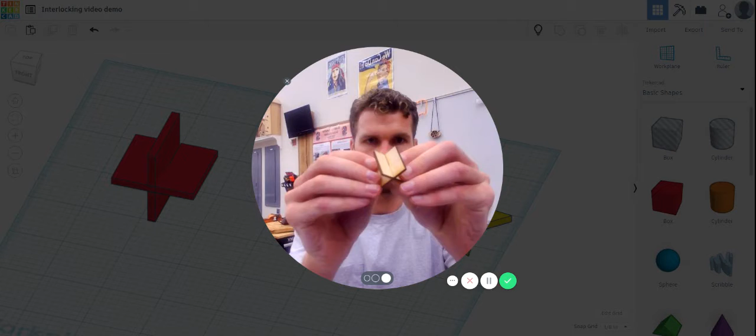Hello, students. So far, we've been designing things for the laser cutter that end up being pretty flat. That's fun, but we might want to start making three-dimensional things here. So we are going to learn how to make things that interlock, like this simple little piece right here. And if they slide apart, you can see they slide together and make interlocking shapes.

We can do that with other shapes besides just a square. Got a little vampire thing going on there, or a little star if you want to make an ornament of some sort, or you can make a spooky one for Halloween if you want, or whatever you like. So let's jump right in and have a look at this.

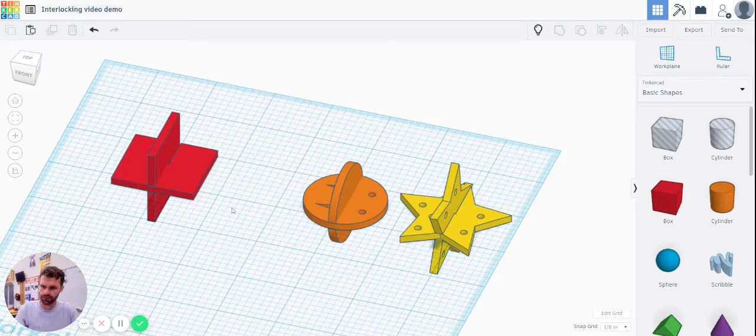So we're in Tinkercad. Here are those three objects in the virtual world. Let's start designing, and this can be really any shape you want. Maybe this time I want to start with a heart. So we'll start with a heart this time, why not?

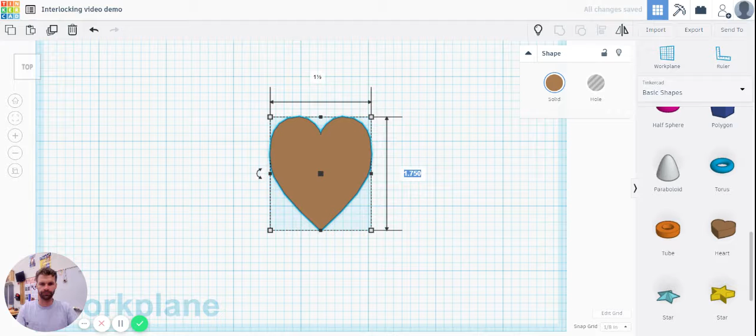The first thing we want to do is make this a reasonable size. Notice I'm already in inches. You should have yours in inches right now. And let's say we don't want to make this too huge. That's a pretty good size.

So the first thing you should do is, if you want to put any holes in there or teeth in there or anything like that, now would be the time to do that. So add your little holes and all that good stuff and group that like we've done in the past, and you can have some fun with that and do everything you want to do there.

Once you are ready to make the second piece and you've had all your designs done there, we are going to first have to make the interlocking piece. So if you see here, we're going to make that notch so that everything can slide together there.

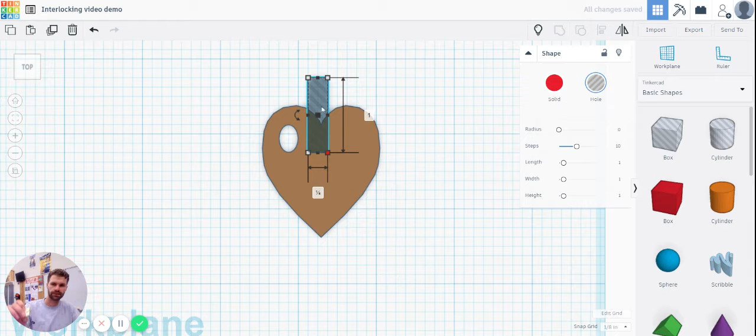So let's start by dragging out a nice little block there. And we're going to make this nice and skinny. How skinny this has to be depends on how thick this wood is. And I know, because I measured this for you all, that is going to be 1/8 of an inch, or 0.125 if you want to think of it that way. So let's squeeze this down and look at that. It snaps to 1/8 of an inch there.

And I'm going to get that nice and centered. And you know, that's not centering perfectly for me. So if you really want to get exact, you can use this tool that we've done before and align. All right, once you're happy with that, it's in the right spot, don't group it yet.

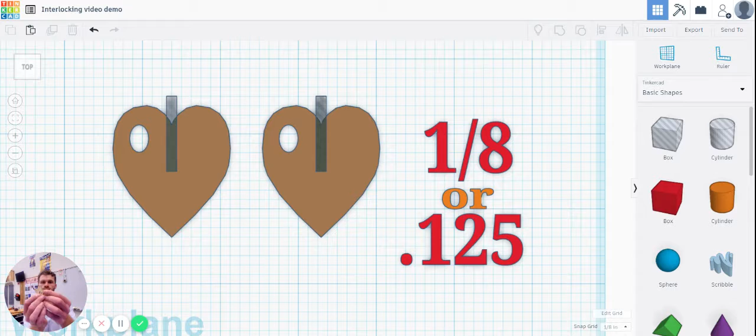We're going to make a copy of it. I'm going to say duplicate. I'm going to slide my second copy over here. And if you'll notice, when I have my star here, one notch is in the top, the other notch is in the bottom. And they line up where one starts, the other one ends, right? So when they slide together, they fit together in just the right spot.

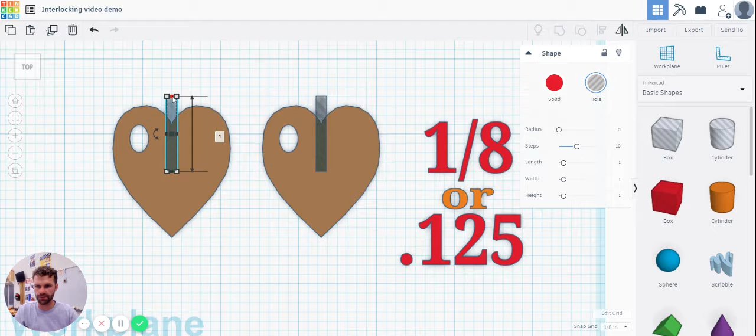So the easy way to do this is just to grab this and go. Now, if I was to move this over here, you can see that it lines up right there. Those two notches are going to line up in just the right spot.

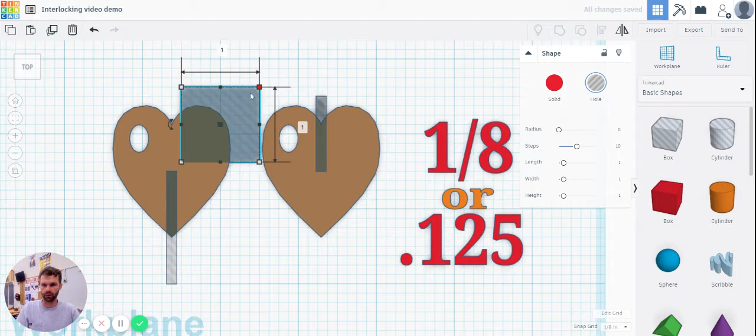Now, if you want to make one different than the other one, maybe you want to add some extra things to this one, you can always come back and maybe you want to put a square on there or whatever else. You can make it different. You should not have these parts overlapping like that. That's going to cause issues for you. Make them nice and separate.

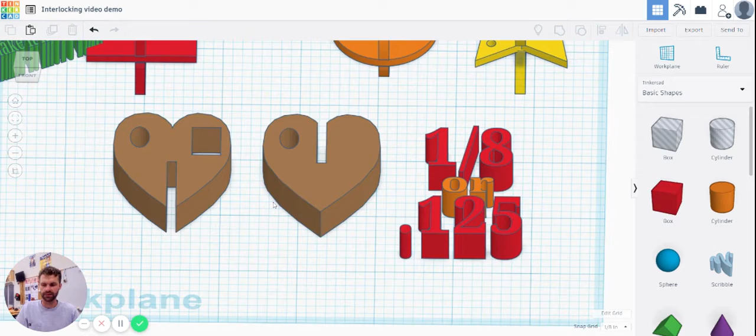When you're all good to go, you are going to group that, and you officially have two pieces that are going to interlock. So you'll notice that these other ones I had, they are like 3D mode, right? I put them and made them 3D. So I turned one of the pieces.

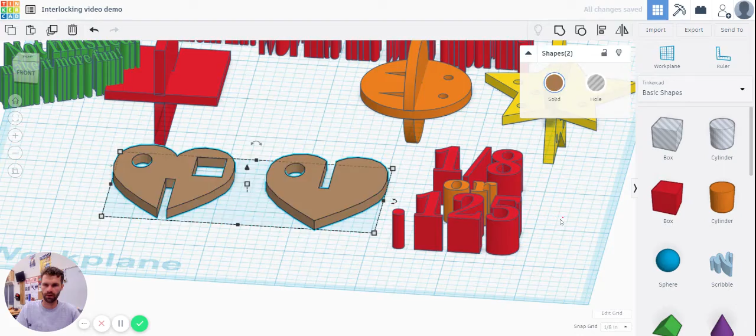Also, you'll notice that these are both a little wide right now. Let's make both of those the correct thickness here, which is going to be that same 1/8. When you are ready to export, as it says right here on the screen, leave them flat. This is good right here. That is good for exporting.

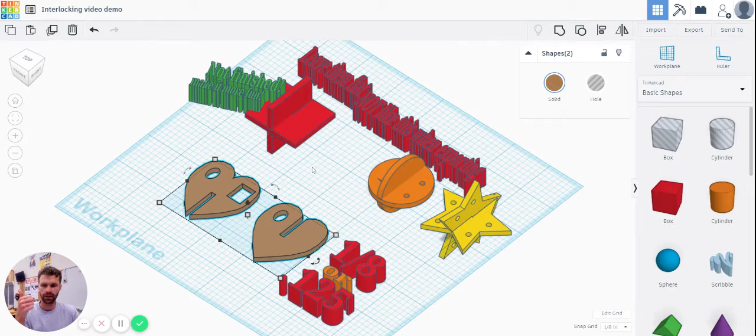When they're in 3D mode like this, if you decide to put them in 3D mode like that and rotate them around and play with them, put them back flat when you're done. They will not work if you have them like this, right? Notice these pieces just slide apart like that.

Also, this one is not good enough. That's too boring. Have some more fun with it. Put some holes in there. Get crazy. Make it look like some character from a video game if you want. I recommend Mario characters, like the little bomb from Mario or something like that.

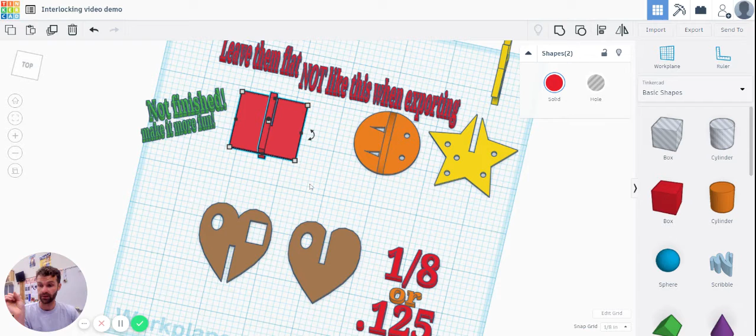It's up to you. Anyway, if you are thinking you get through the first one and you're like, oh man, this is fun, I want to make another one, I would like to show you my little side project over here. You want to make like a little animal. If you want to get crazy, you can do this after doing your first simple one. Get your animal together.

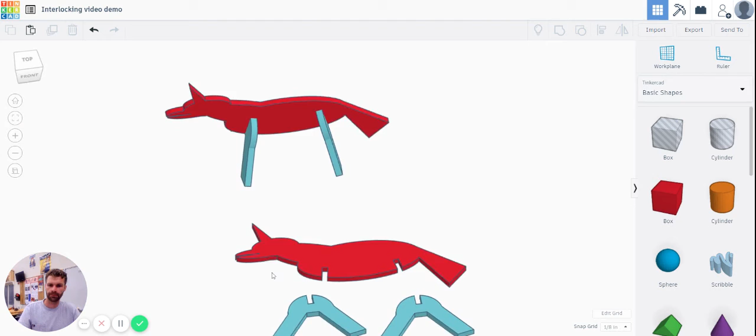This is after, I'm going to reiterate this, this is an extra bonus project. So if you notice, I'm ungrouping this to just show you how it was put together. This is just a whole bunch of shapes put together to make a little horsey there, right? And then those blue parts are also just other pieces put together. And these notches have to be that 1/8 inch.

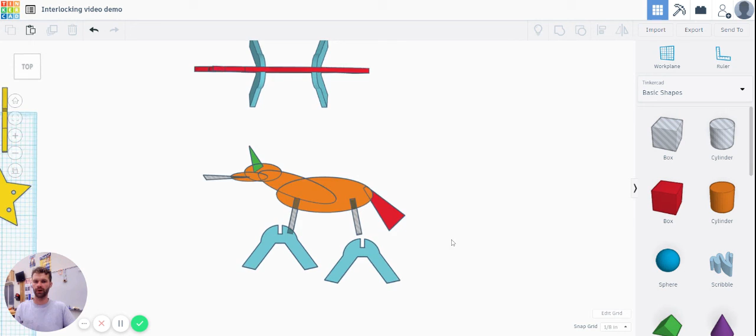Again, this is after. If you are all done, you can go ahead and play and make some more complicated ones, making interlocking pieces that come together like this. Hope that gets you started. Enjoy, bye-bye.